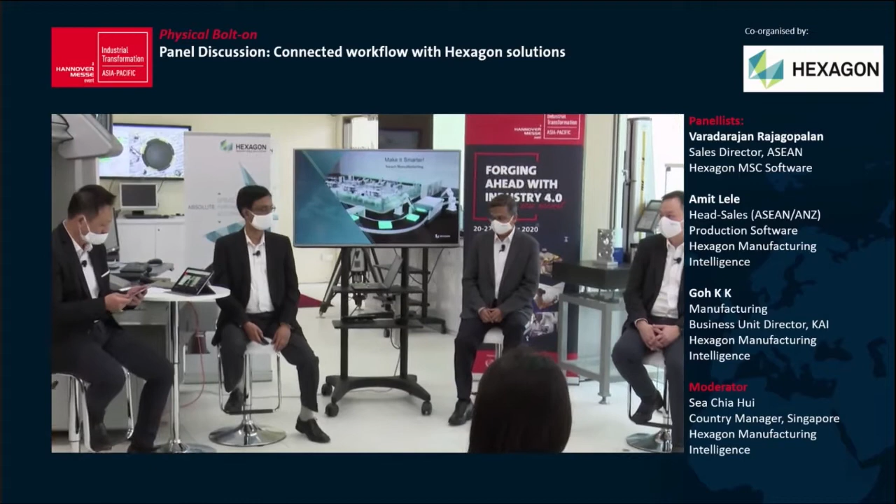So it's my pleasure to be moderator for this session, Connected Workflow with Hexagon Solutions. First of all, may I briefly introduce our panelists for today. Mr. Vada, Sales Director, Design and Engineering. Mr. Amit Lele, Head of Sales, ASEAN Production Software. And Mr. KK Goh, Director, Manufacturing and Production Business Unit. And myself here, I'm the Country Manager.

So we are all concerned about smart factory. I believe that technology has changed. This involves the integration of the physical and software in production. Industry transformation is coming fast. And to compete in tomorrow's world and beyond, our customers are realizing the need for organization transformation, flexible production, and digital transformation. So the question is, are you ready for Industry 4.0? And what challenges do you face in the near future? So let's take a look here.

So Mr. Vada, in your opinion, what is the role of simulation in industrial transformation? Oh, thank you. Excellent question. So when we visit our customers and their shop floors, we see they spend so much time and effort doing trial and error methods to make the manufacturing process and their process parameters correct. This includes stamping, bulk metal forming, rolling, forging, welding, even painting process. So that takes a lot of time, money, and effort to make these things correct. And even then, many customers cannot make those things correct.

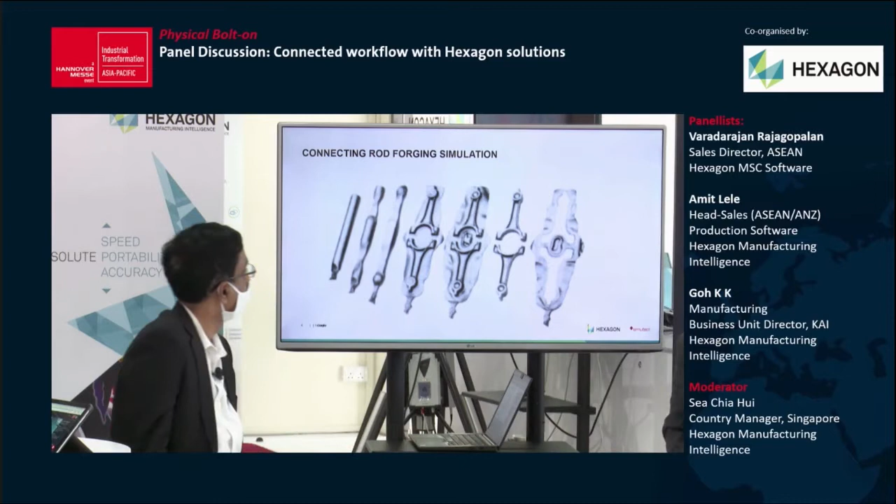So simulation helps to do all these things digitally, virtually in a computer, study everything, optimize everything even before a physical tryout. Let me give a simple example. This is a connecting rod. This connecting rod goes through 7 different steps before the part is manufactured. So, this is the first step.

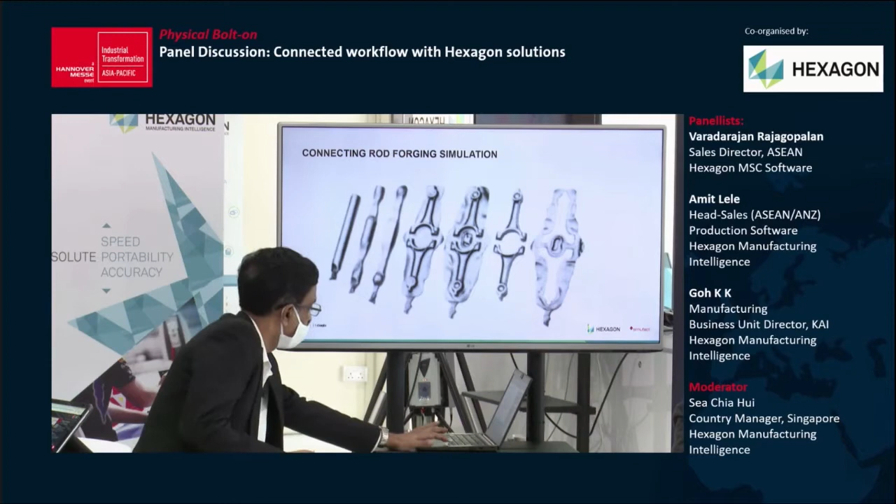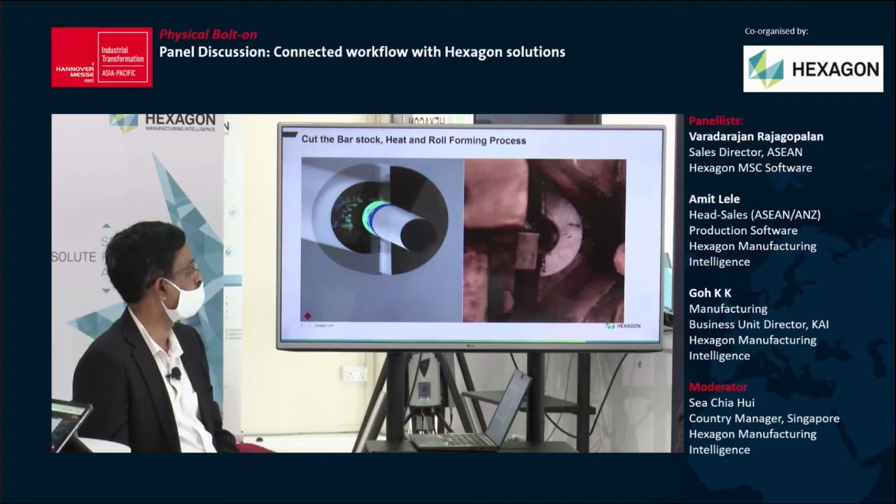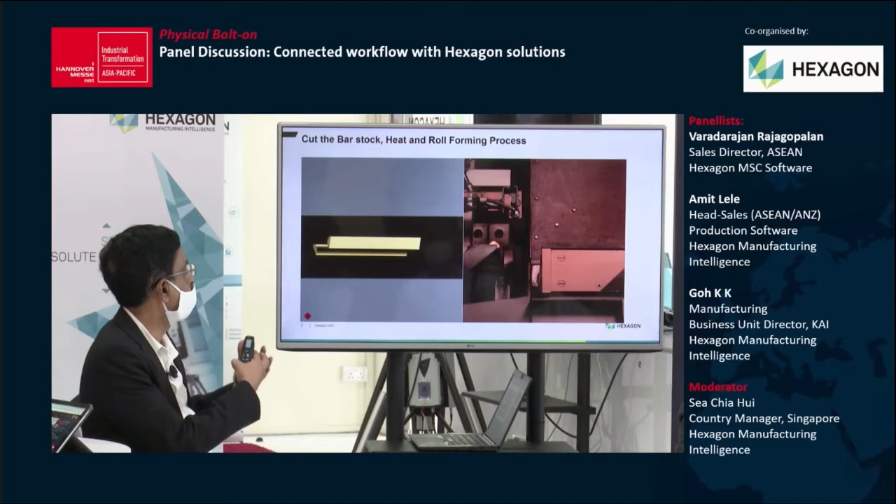So this is the first step where we have the bar stock coming up, and there is cutting. The second step involves heating and also the roll forming process. On the left hand side is the simulation, and the right side is the physical one. Here the bar gets heated up, and on the right hand side it is being heated up, but on the simulation side not only can you see the bar getting heated up, but also the internals of it, how the temperature distribution happens.

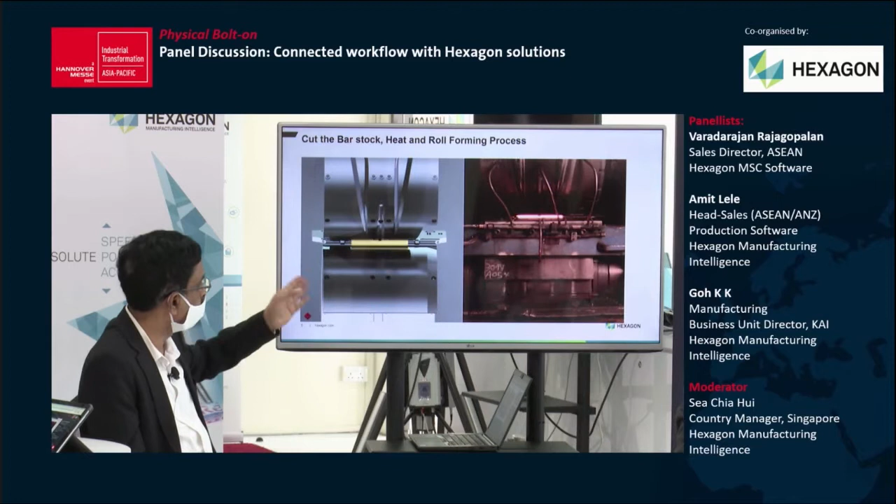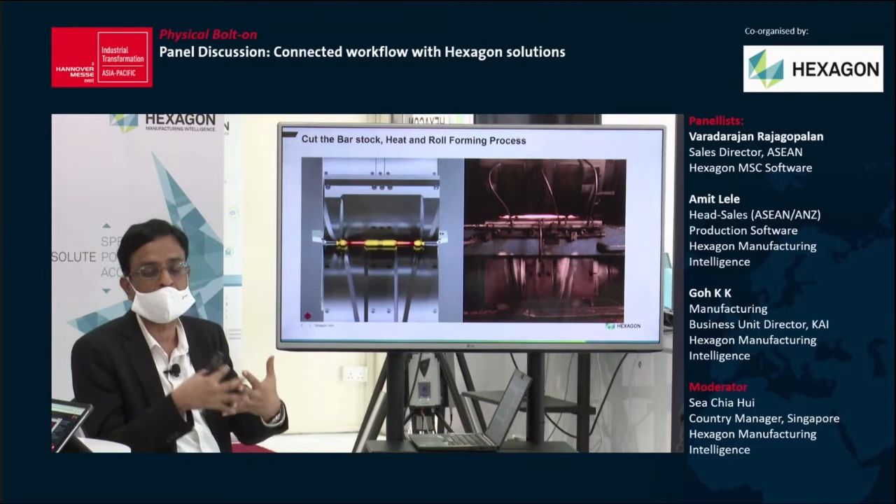The next step involves the rolling process. Okay, this is an intermediate step. In the rolling process on the simulation, not only can you see exactly what you do, but also you can see the plastic strains. That is the intelligence behind what happens inside this particular part.

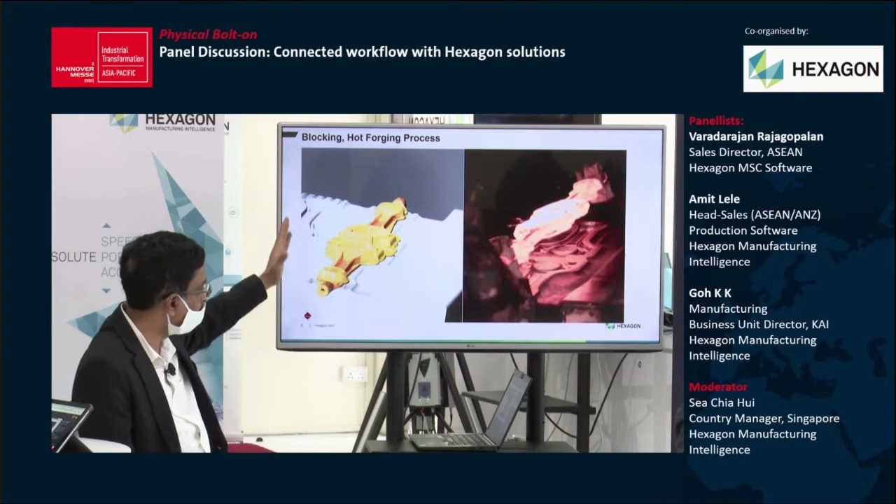The next step is the hot forging process. This goes through a 3 or 4 step process. On the right hand side, it is being hammered, and you can see the same hammering happens on the simulation side. You can see both of them happening in parallel. And whatever the number of steps, 3 or 4 steps, you can really do this on the simulation side.

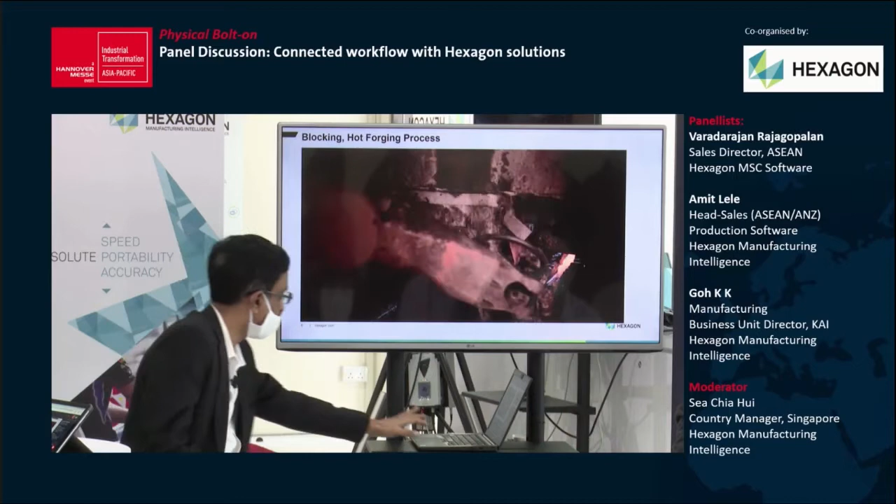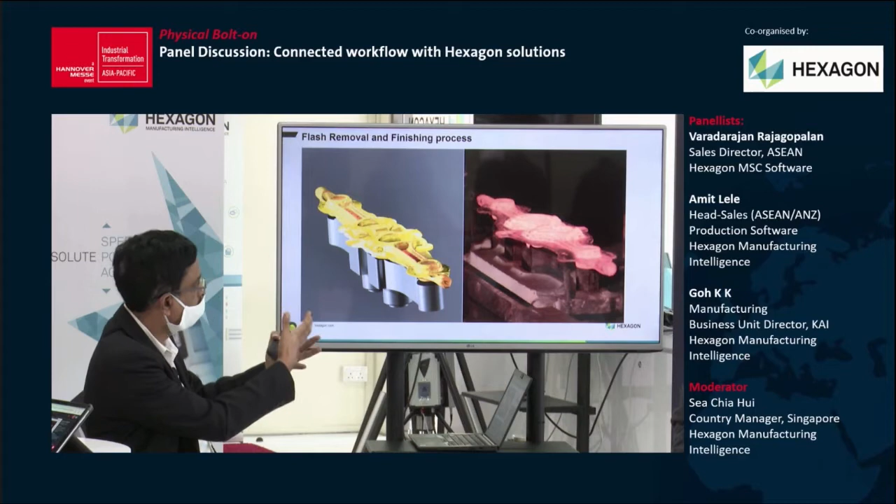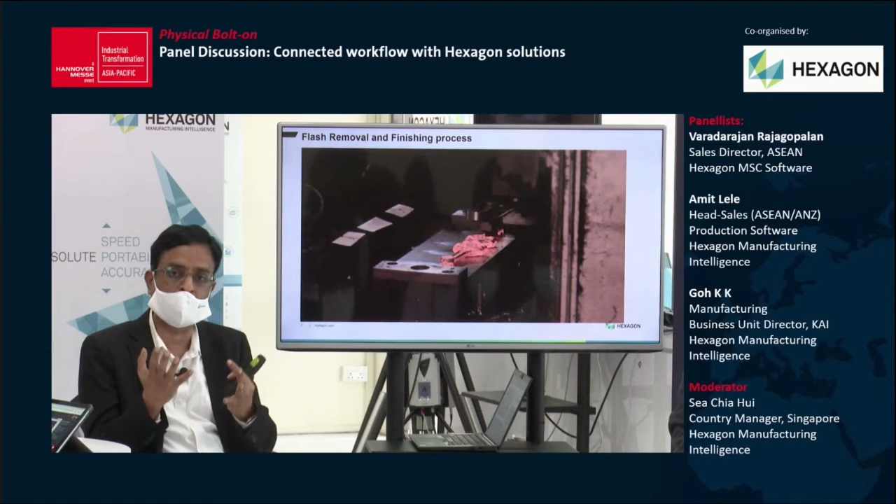The next step involves the finishing of the process, okay? The flash removal and the finishing. At this intermediate step, it stands there, then you get the hit, the flash is removed, and the final finishing happens. But what you see here is not only are you able to perfect the process, but also you get the internals of what is happening.

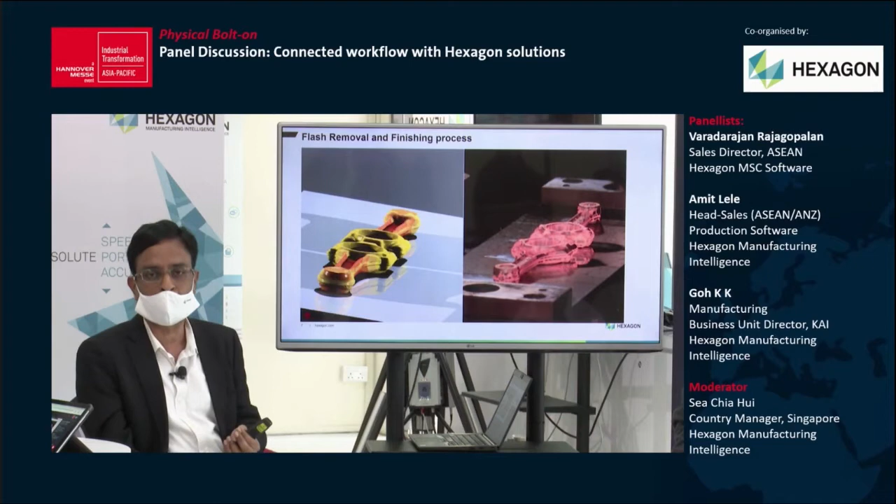After the part is manufactured, if there is going to be any failure, anything happens, you can see it in the simulation process. So in short, simulation helps to digitally transform what you do physically in manufacturing into the virtual. Thereby you gain time, you save cost, and also optimize the parameters.

Flash is a very important thing for all those people. If you can reduce the amount of flash, it directly involves the money, okay? So that way, Hexagon MSC Software is in a position to do a digital transformation of what is being done physically into a virtual way.

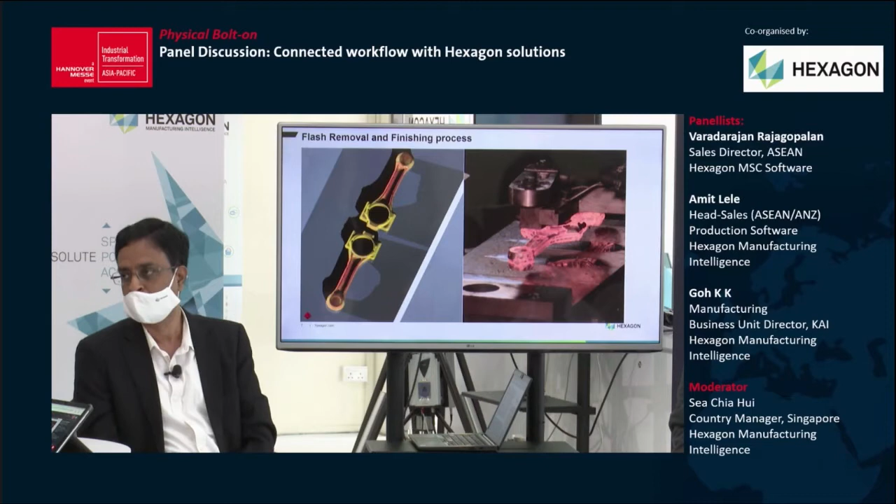Thank you. Yeah, this is great. But could you elaborate in detail on the technologies from Hexagon?

Yes. So Hexagon has gone from this kind of simulation into what we call a multiphysics co-simulation. Let me explain with another example, what we call a crash box. Crash boxes are used in crash conditions. These are components which absorb a lot of the energy in the crash, so that they can save people and save critical components.

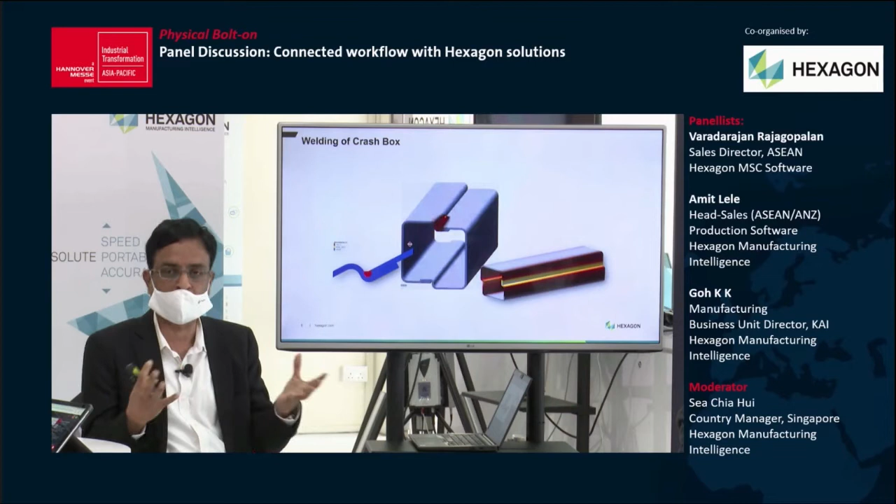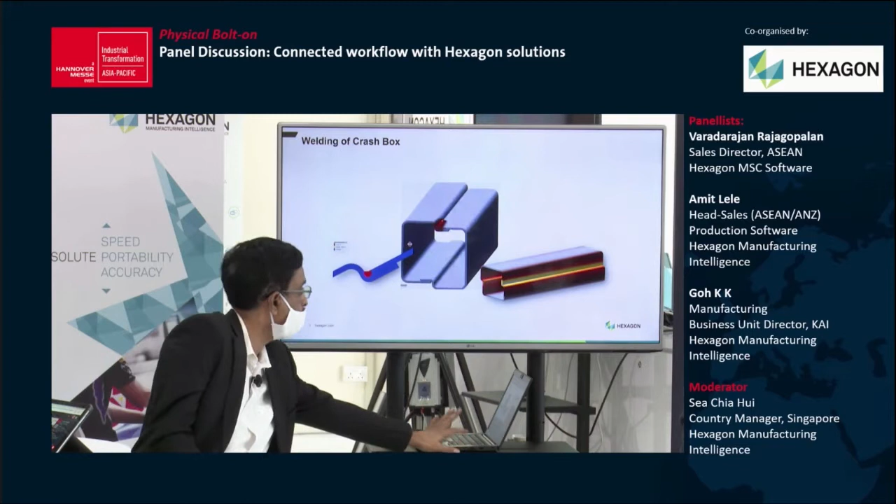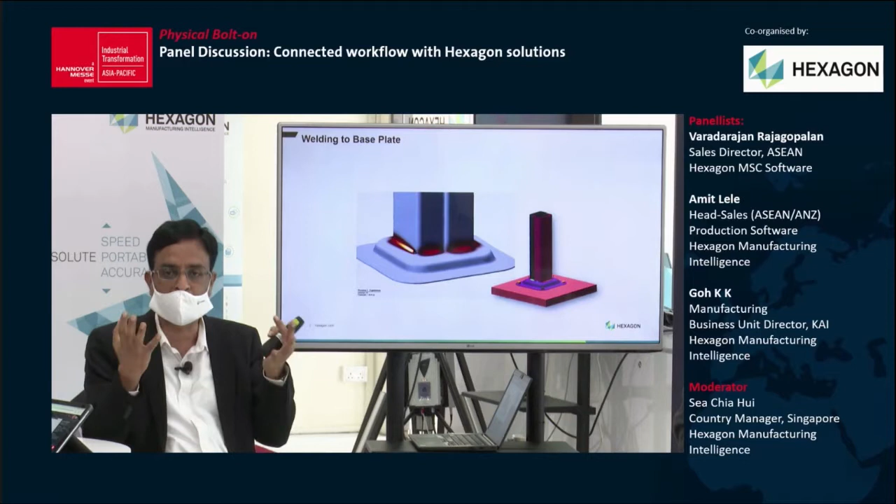So Hexagon has got this welding simulation software. We can simulate various types of welding. So this is the bar. Then this is being welded on this base plate, where we can understand and optimize the welding strategy, fixing strategy, the way you do the welding, different types of welding. After that, what happens?

This goes into the actual simulation process. There are 2 types of simulation done. With history means after the welding is done, it generates so much heating, and during the cooling process, so many internal forces are captured. If it is not accounted for in the next simulation, what we call the explicit crash simulation, the results are wrong. See here, this is with the history.

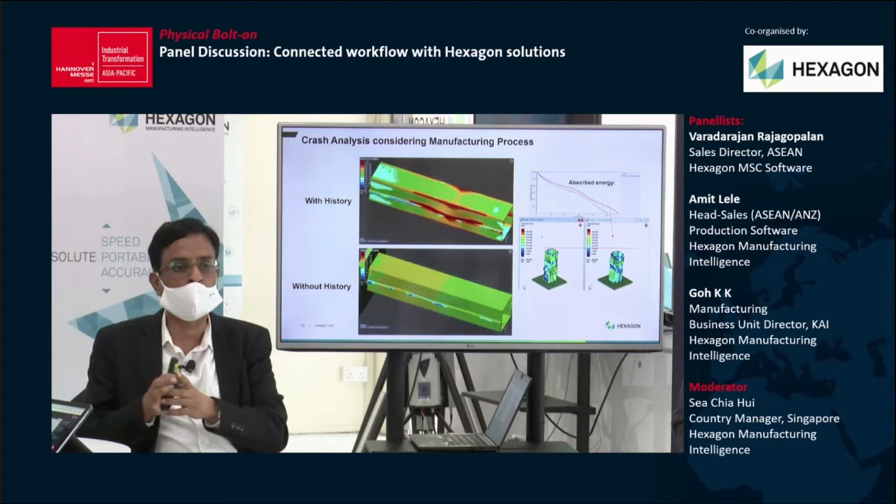You can see the way it is failing, and without the history, here there is no welding effect included. It is different, and also the amount of failure with history is different. So that way, Hexagon MSC Software is in a position to get the simulation right the first time in a correct way. Thank you so much.

Right. Thank you, Mr. Varada. So Amit, the questions from the customers today are also about designing. So in your opinion, what exactly does smart concept to reality mean?

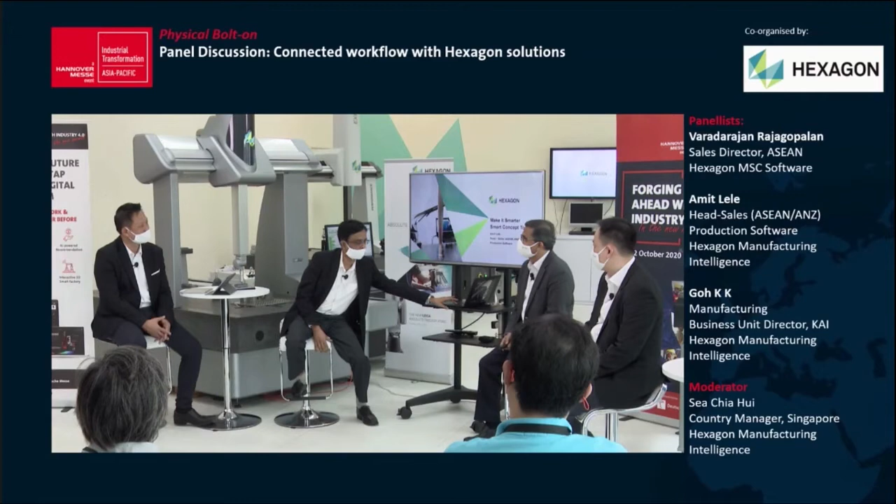Yeah, thank you, Sea. Smart concept to reality is an important part of the Hexagon connected workflow. As we know, for Hexagon, our motto is quality drives productivity. So manufacturing companies can enhance productivity by ensuring quality at every stage of the product life cycle by using Hexagon solutions.

We help our customers and manufacturing companies collect and analyze data in the digital world, and also help them convert it into meaningful, actionable output to be implemented in the real world, through various Hexagon solutions. And the best part is the entire suite of solutions is interconnected with analytics, with platforms like SFx and Xalt from Hexagon.

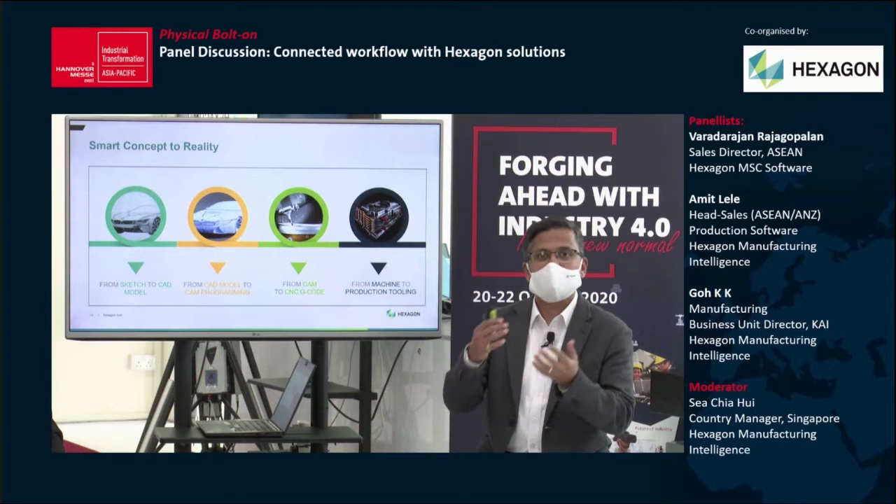Coming back to your question, this is how we can explain smart concept to reality. Basically, it starts with a sketch or a physical part which needs to be converted into a CAD model. The CAD model is converted into CAM programming. The CAM program is converted into a relevant NC program which is valid for that particular CNC machine or controller. Then it is validated, optimized, and simulated in another Hexagon solution before the actual manufacturing of that part takes place. So this is a brief explanation of concept to reality from Hexagon.

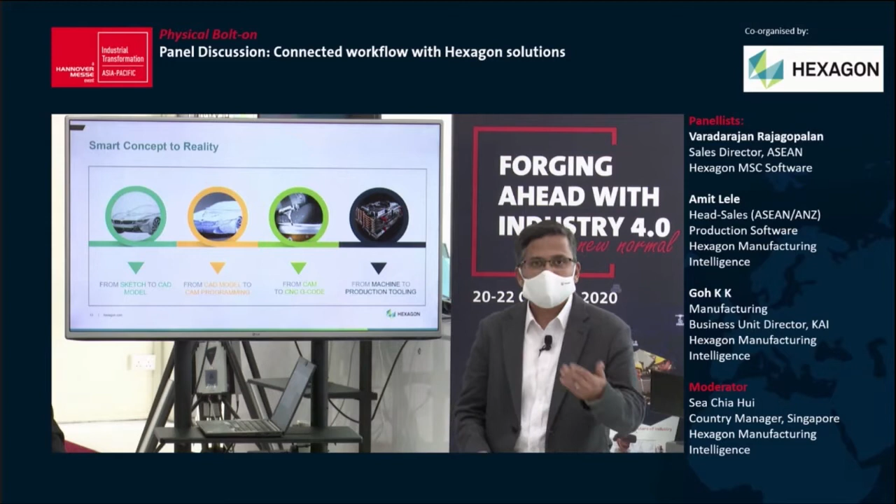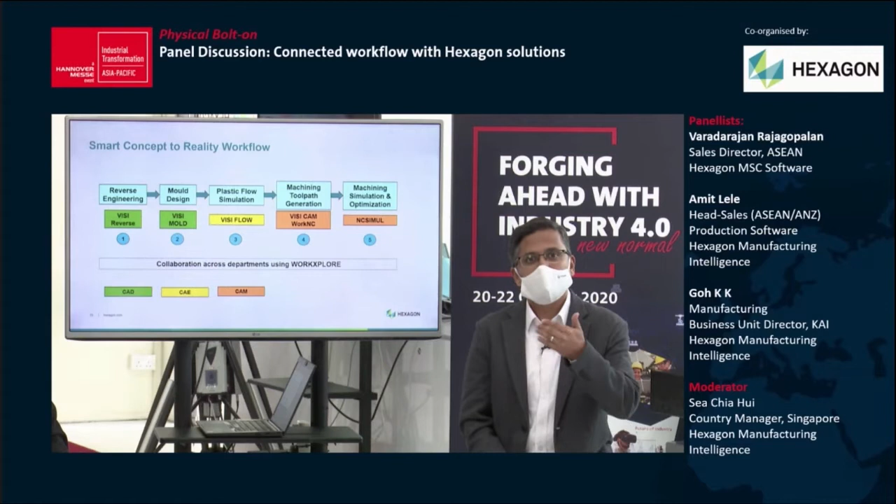And as we have seen, we have demonstrated this particular part here called a mask holder, which has become very prominent in recent times because of the pandemic. And this is the process we followed from concept to reality for the mask holder. You'll be surprised to know that we did not have a CAD model for this part. So we reverse engineered it using the Hexagon Absolute Arm and also VISI Reverse software.

Then the CAD model was converted into a CAM program. Before that, there is a mold design step, optimizing and adding some accessories for the mold. Then VISI Flow is used to simulate and check any probable manufacturing defects before the injection molding takes place, like warpage, air traps, and weld lines.

And then once the optimized mold and accessories are ready, it is converted into a CAM program using the VISI CAM module from Hexagon. And then, of course, once we have the G code, which is valid for the relevant machine, it is checked with a solution called NCSIMUL, which validates the G code.

It is simulated for any kind of possible accidents or interference, and then it is also optimized in terms of the cycle time and the tool paths overall. And the best part here is everything is done digitally in the digital world before the manufacturing companies actually start manufacturing the physical part on the machine.

And WorkXplore here, which is basically a collaborative 3D viewer, helps all the functions, all the departments in a manufacturing company to access the CAD model without really spending a fortune on a classic CAD kind of solution. So this is in brief, the smart concept to reality fundamentals in Hexagon connected workflow.

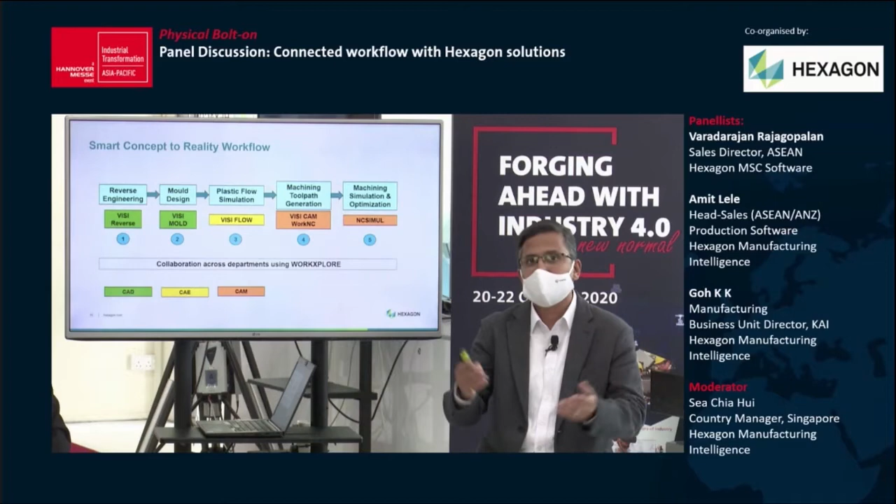Thank you. Thank you again, Amit. Thank you for a very detailed explanation about smart concept to reality. So here's a question for you, KK. We know that Hexagon have introduced many new exciting technologies today, and one of them is actually asset management. So in your opinion, can you tell us a little more about what is this SFx Asset Management tool?

Yes, thank you, Sea. Let me just briefly explain that we all understand that data is the new gold, it is the oil. So SFx Asset Management was designed with the concept of getting data from end-to-end solutions. That's to say, from your production software, from your production, from your process, from your design, from your quality inspection, how do we link them together? As you can see over here on the screen, it basically explains that we are able to connect all your processes and manage them from end to end.

And that itself is important because it helps you to increase speed, because you get to know information fast enough. It helps you to maintain your quality at every stage, because once you have data, you're able to act timely and accurately at the right place. And of course, with that, you will save costs because you reduce your scraps, because you're able to take decisions at the right time, at the fastest time.

That itself will help you to compete well as a manufacturer, because we can't always be going about lowering costs, but basically we are looking at ways to optimize your process. So SFx Asset Management is designed in this concept to link all your processes, all your machines together to give you the ultimate information, so you can optimize your processes.

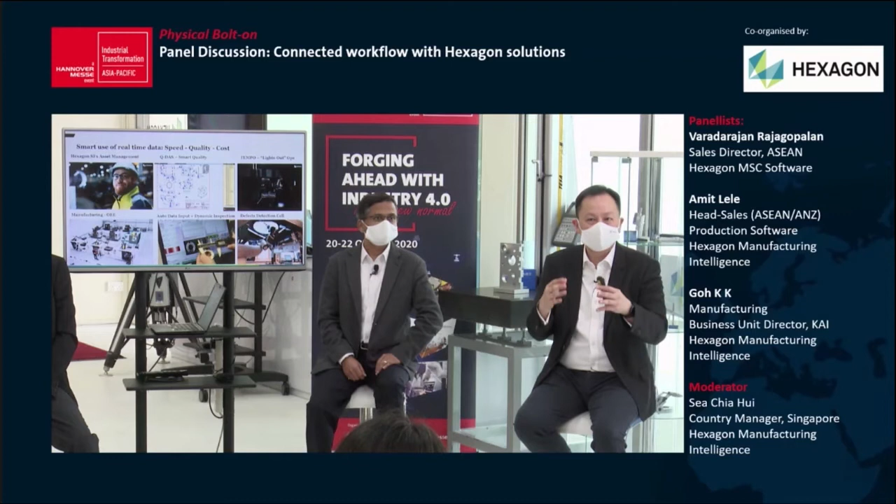I can also just briefly share two of the possibilities: what we call a tempo, that means automation, allowing you to have 24/7 lights out operation, and even a defect detection cell that allows you to quickly detect defects 24/7. All these are very good examples of how you can have this closed loop feedback back to your machine, back to your design, back to your production shop floor to make sure everything is A-OK. Thank you.

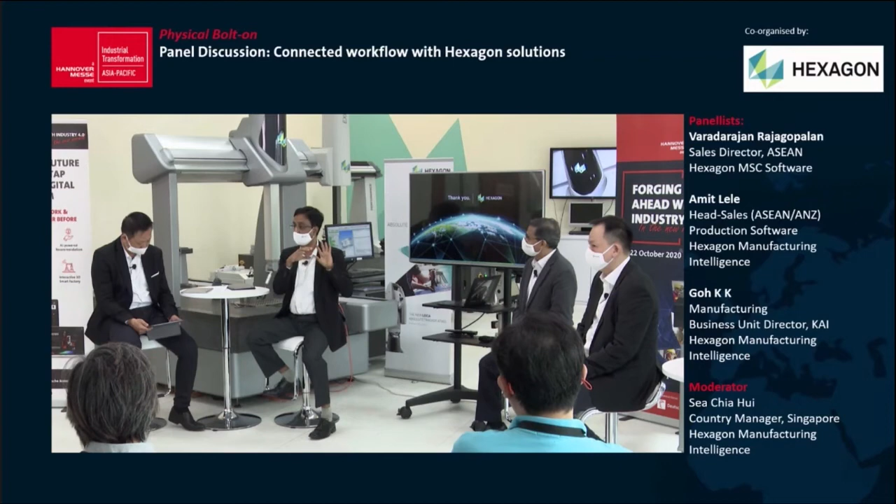Across ASEAN, we see that there are two types of users. One, those people who use this design and engineering for R&D to improve their products. Then there is another set of users who use this software to improve their manufacturing processes. So we see two different things depending upon the way the ASEAN countries are. For example, in Singapore, a lot of R&D related work happens, but we go to a place like Thailand, Vietnam, where there are more suppliers and a lot of automotive companies.

There we see the manufacturing related companies. We even have customers who make bolts, to manufacture the bolt. You may think the bolt is very simple, but that really goes through 6 different processes. They make a lot of money by simplifying the process, maybe consolidating these processes.

So today we see that this digital transformation of taking out the physical tryout by a virtual simulation is gaining popularity. Even before this COVID situation, we saw that it was already there. But with the current COVID and beyond COVID, we see that the adoption of going from physical to virtual will move up very, very fast.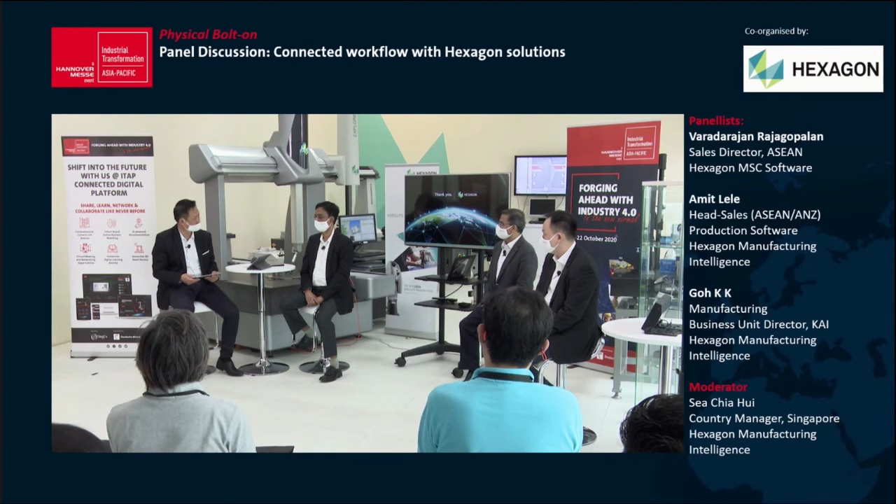So maybe back to you, Vara, what would be the one key takeaway you have for our audience here? The thing is, move from physical to virtual, gain time, gain money, and gain competitive advantage. Thank you. All right, thank you. I think that's right to the point.

And what about yourself, Amit? In your opinion, what would be the one key takeaway for our audience? Yeah, digitalization is real. It's no longer just a term, and we are all prepared to partner with all the manufacturing companies, to be along with you in this journey. Let's do it together. Let's reach the destination of digitalization together. So that will be my one takeaway.

Okay, thank you again, Amit. So maybe also to you, KK. Yeah, my one takeaway is embrace technologies. Think big, start small, so that you can scale fast once you see the result. Embrace it.